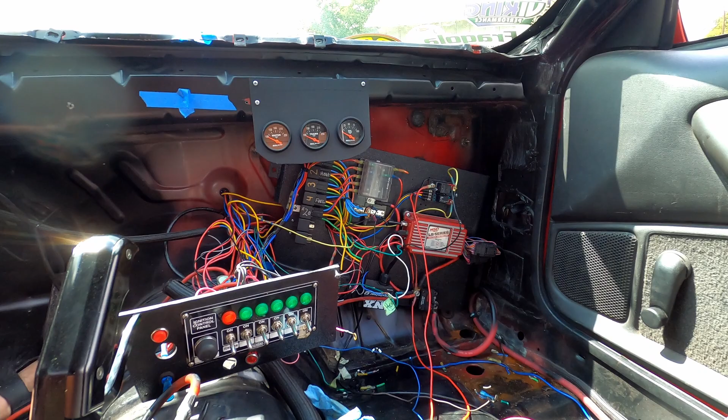Alright, here we are again. Went through all this wiring, redid some of it. Basically all the nitrous side and a few other things here and there. But anyways, long story short, got the two-step in on this button, wired on with the trans brake in series.

So when I hit the button, the trans brake and two-step will be engaged, and when you let off the button, you let the nitrous window switch, progressive, and then trans brake interrupt. All that'll do its thing once you let off and let the nitrous come on.

But right now we're just testing what we just did and a few other things, and we'll do a little test on the trans brake. Seems to work pretty good. I got it set at 2500 just for testing. Obviously not going to come out crazy at 2500, but just want to test it out and make sure the wiring's right.

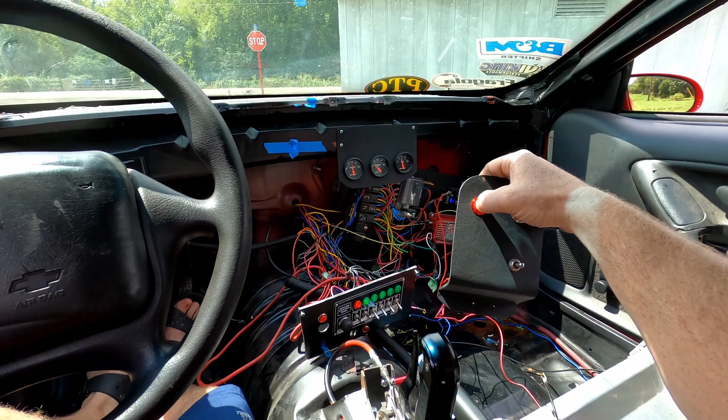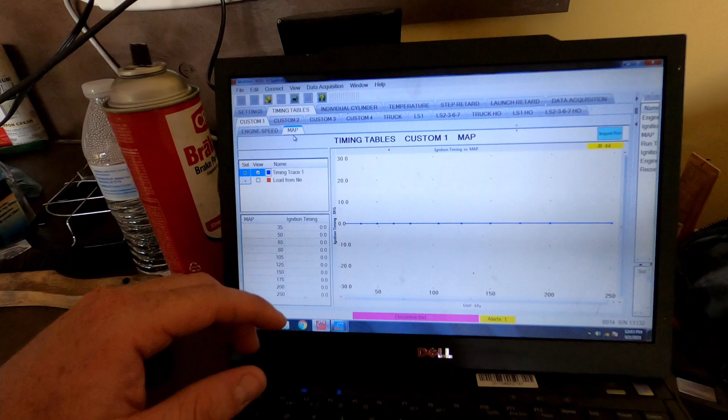Also messed with the MSD ignition controller a little bit, learned about that. Never messed with one, but it's fairly simple. Long story short, without the MAP hooked up, it's getting 0 volts obviously, so I'm assuming 0 volts or close to 0 volts would be 35 kilopascals.

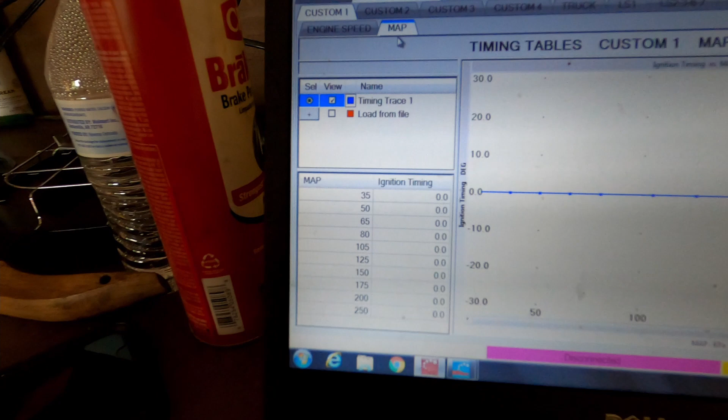So if it's always saying 35 kilopascals because it's defaulting to that 0 voltage reading, I zeroed it out. I zeroed the whole table, but usually this table is populated. It's an adder table, so it's going to add whatever timing based on vacuum additionally to the base timing table based on RPM.

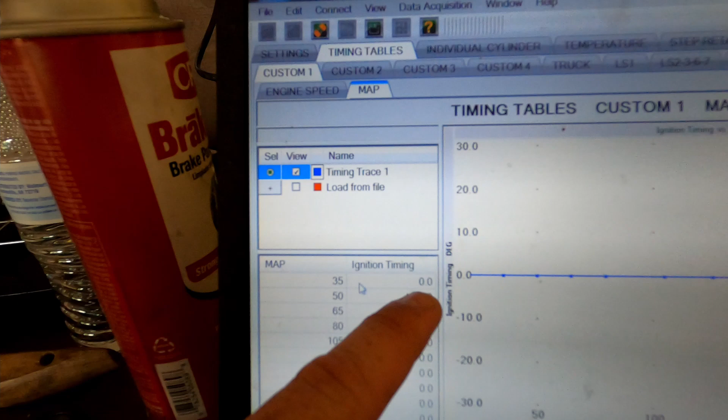So if you don't zero this table out, if you're not using the MAP sensor, you're going to have some wacky timing most likely, because I think it had 5 degrees or so in that row. So it would be adding 5 degrees to your whole base map, which obviously is not good. Unless you're accounting for it, which I doubt you are.

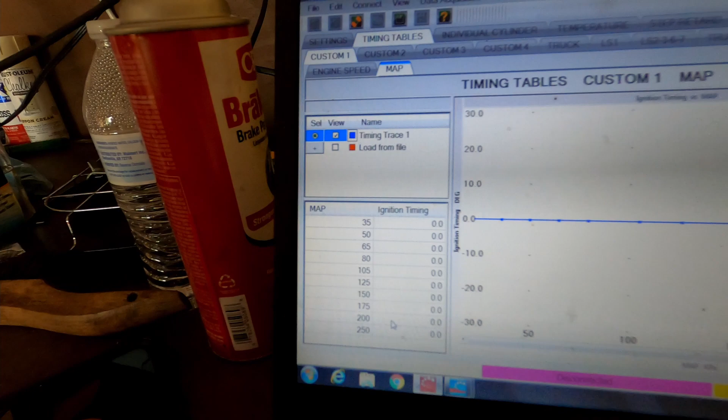Obviously if you run boost, you should know all this. But if you're running any boost down here above atmospheric at 105, it was pulling timing. So obviously you need to keep this in mind if you get one of these. I'm just now dabbling in one, but it seems pretty simple.

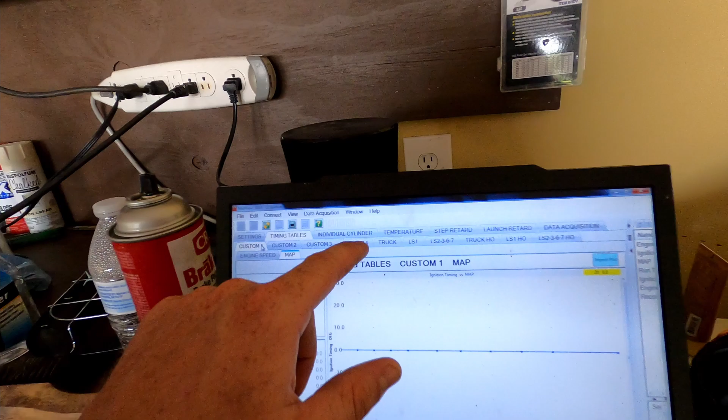I mean, there's 6 positions or 8, however many. 1, 2, 3, 4, 5, 6, 7, 8, 9, 10. Okay, 10. I was a little off. Long story short, each one's configured differently. So you can select it with the screwdriver physically on the box. Then you still have these settings, which I guess are global, if you want to phrase them that way. Maybe I'm not using that right. Anyways,

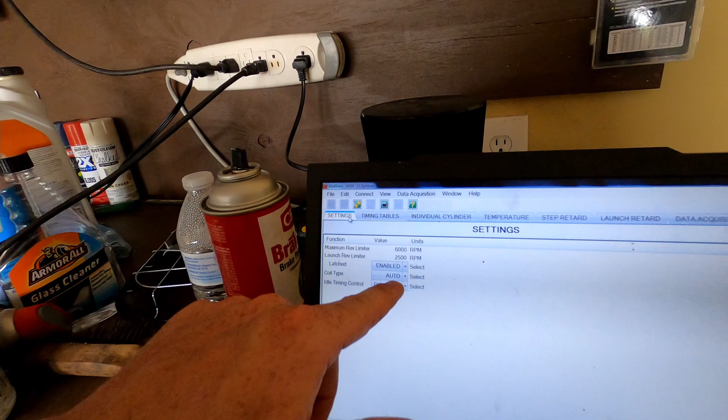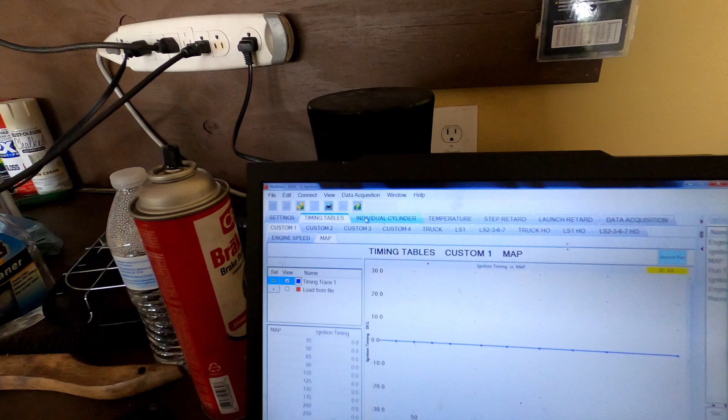coil type to auto. That just keeps the guessing out of it, especially if you're chasing yourself with a miss or anything like that. It's based on the reluctor wheel, I believe. But like I said, the launch rev limiter, the two-step, was at 2500 RPM on that test. So that's where that came from. Timing tables, those are your individual positions on the 6014 MSD. Individual cylinder timing could be helpful if you're super serious.

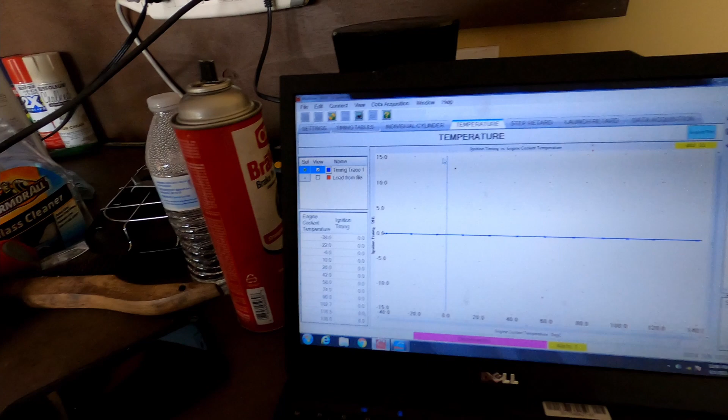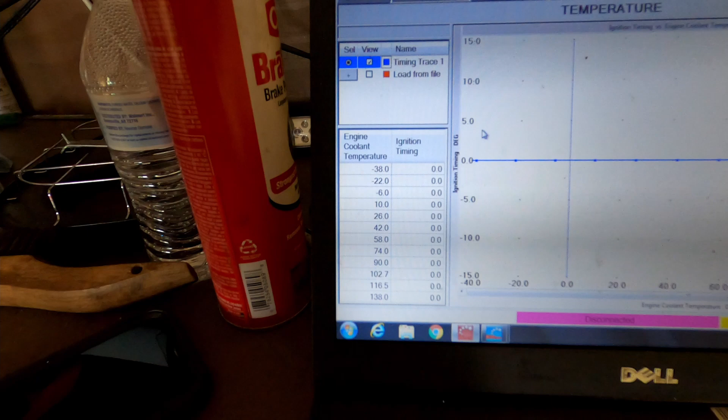Temperature, I zeroed this table out also. I'm assuming it's an adder, I'm sure it is. I zeroed this out because the engine coolant temp sensor is not hooked into this. So it would do the same thing and add whatever values were in this column to your base timing map at the beginning. Yeah, you got a few more things.

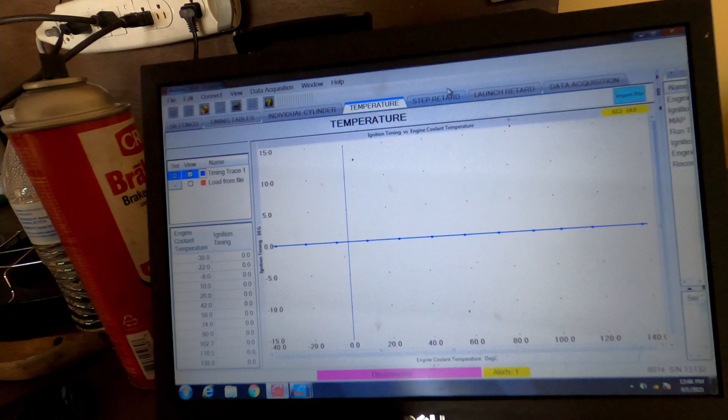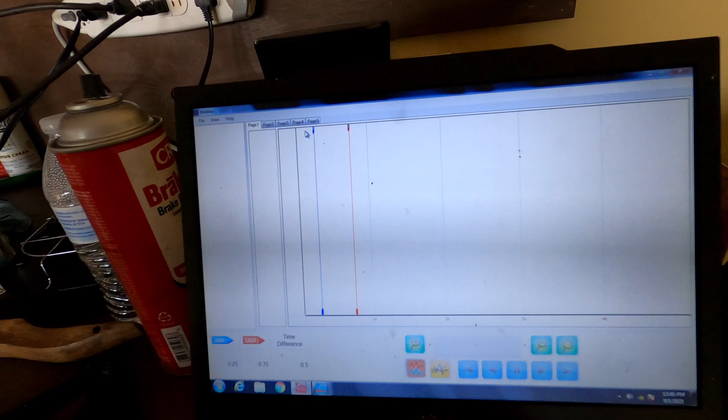Your step retard, launch retard. Data acquisition, I guess, is similar to logging on this thing, or is logging. MSD View. I'm not hooked up, so it probably won't do anything, and I haven't used this, but it appears you can log with it. It seems pretty self-explanatory if you've been around tuning. If not, hopefully this helps you a little bit.